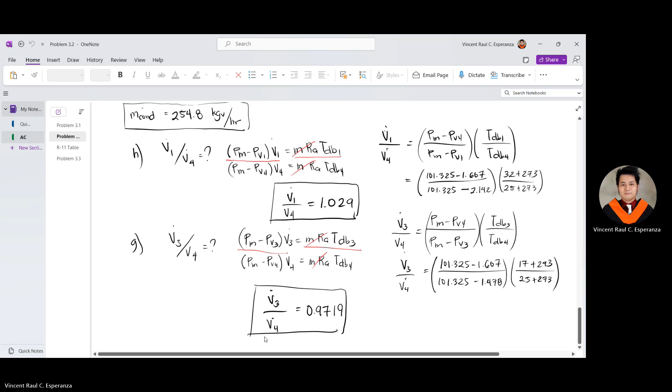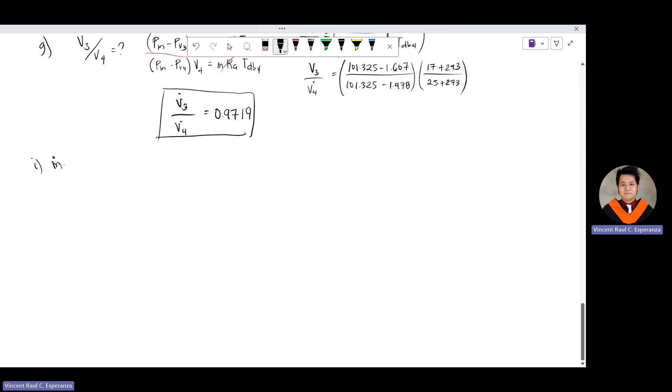I think we need a table for this. So letter I: what is the mass of R11, or let's just call it mass of the refrigerant, capital R, in units of pounds per minute. The mass of R11 per minute, given the evaporator temperature is negative 20 degrees Celsius and the condenser temperature is 30 degrees Celsius. So this is an application of refrigeration.

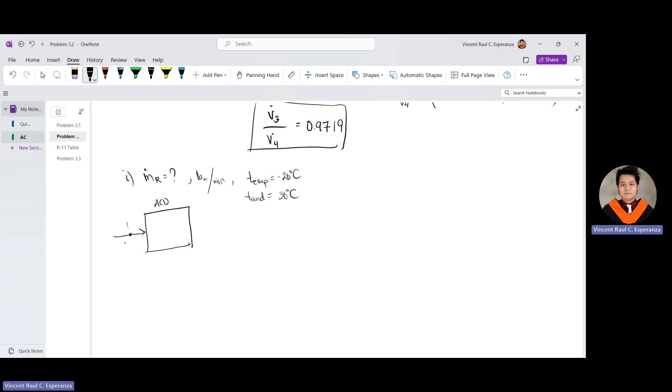So first we will draw the air conditioning unit. This is our ACU. At point 1, air enters with a given dry bulb temperature and relative humidity, which we already solved. At point 2, we have the dry bulb temperature, which coincidentally equals the dew point temperature at point 2. And if not stated, for a cooling and dehumidifying process, the relative humidity is equal to 100%.

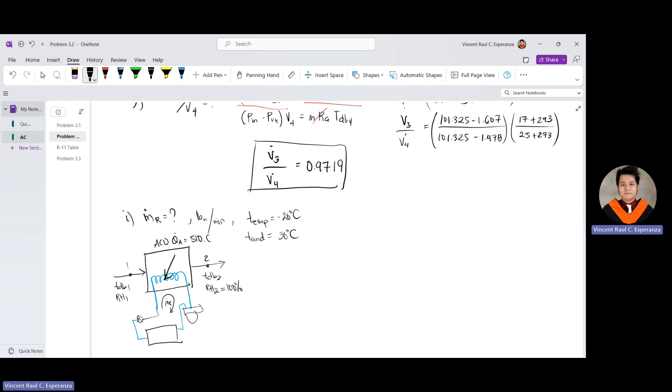So what is QA? 510.6 kilowatts. We already solved this yesterday. 510.6, is that correct? Yes, 510.6. Okay.

So we know that in the evaporator, which is also our air conditioning unit, QA is simply equal to the mass of refrigerant. Let's label these points. If we go up to this point, let's call it point 5, point 6, point 7, then point 8.

Mass of refrigerant times H5 minus H8, where H5 and H8 are the enthalpies of R11. So the best approach here is to draw a pH diagram for R11.

At point 1, at point 5, this is a saturated vapor, and the temperature mentioned there is negative 20 degrees Celsius. Let's go to the R11 table. I think this is it. Let's find negative 20 C, saturated vapor, so HG is 378.66.

So going back, hence H5 is 378.66 kilojoules per kilogram. Let's note that. Then from point 5, there will be an isentropic compression.

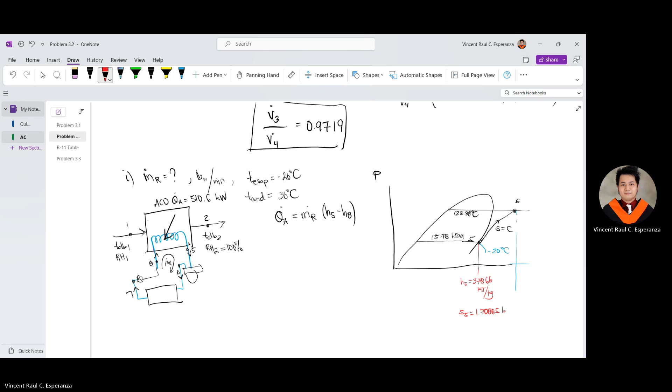1.70885, let's write that down: 1.70885 kilojoule per kilogram-Kelvin. And we know this is an isentropic compression, so the specific entropies at point 5 and point 6 are equal. Since they're equal, let's go to the R11 chart and find the pressure at 125.38 kilopascal.

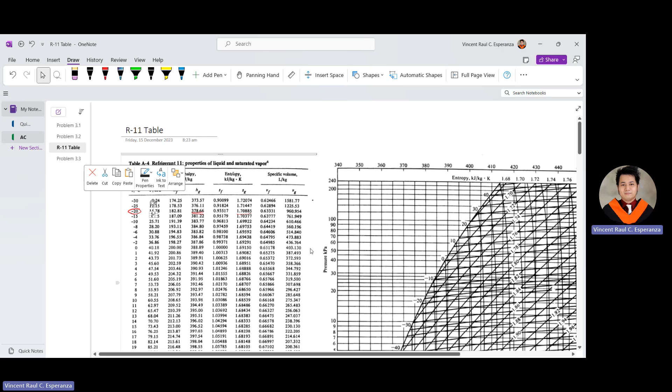Here's our chart. Let me zoom in. There's 125.38. Since this is 100, how many gradations? 1, 2, 3, 4, 5, so this is 150, sorry, 5 more so 200. 200 minus 100 divided by 5.

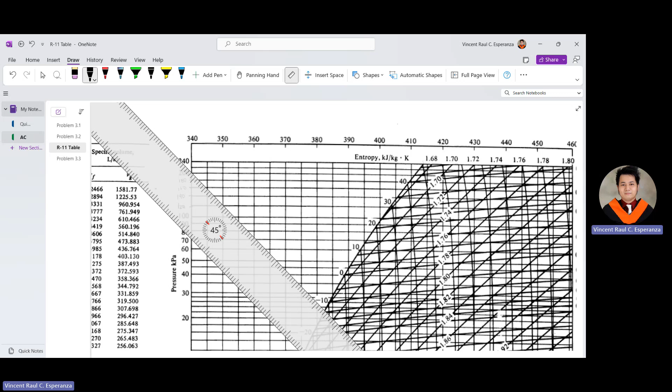Divided by 5, sorry, that gives 20. So the gradations are 120, 140, 160, 180, and 200. And our value is 125. If it's 125, okay, there's a ruler here too.

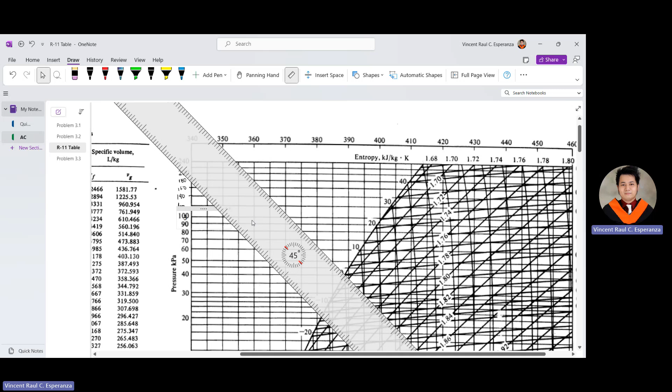So i-drawing natin ang 125. I think dito siya. Yan, 125 kilopascals and yung entropy niya, that is 1.70605, parang 1.71 na natin approximate. So I think 1.71 ito. Yan, so ito yung point na i-consider natin. Highlight lang ito, ating kulay pula.

Ito. At ano yung enthalpy associated dyan? And that is, kung ito 410, 415, kalahati ng 410 at 415. So ano yun? That is 412.5, yun yung ating enthalpy at 0.6. Hence, enthalpy at 0.6 is 412.5 kilojoules per kilogram.

At 0.7, this is what? Saturated liquid. So tandaan natin sa standard vapor compression cycle, at 0.5 the refrigerant is a saturated vapor. At 0.6, wait let me check if this is recorded. Ayan, recorded na siya. At 0.6, the refrigerant is at superheated vapor. And at 0.7, due to heat rejection, we convert the saturated superheated vapor to saturated liquid. So saturated liquid, yung may subscript na F. Remember your thermodynamics too.

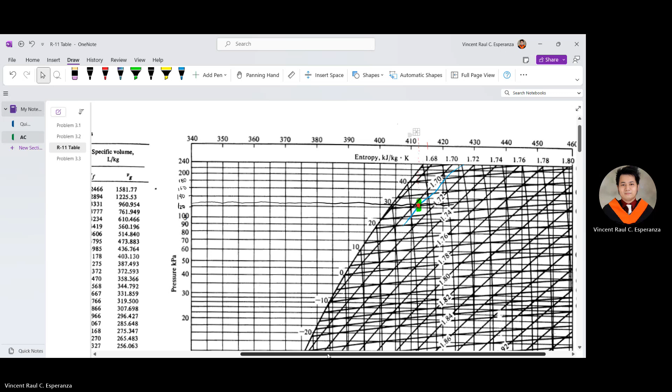At alam natin, from 0.6 to 7, isobaric heat rejection yan. From 0.7, hanapin natin yung HF at 30C. So pull tayo sa R11 table. Balik punta tayo sa 30C. Yan, then at 30C, ang HF niya is, see? HF is 226.10.

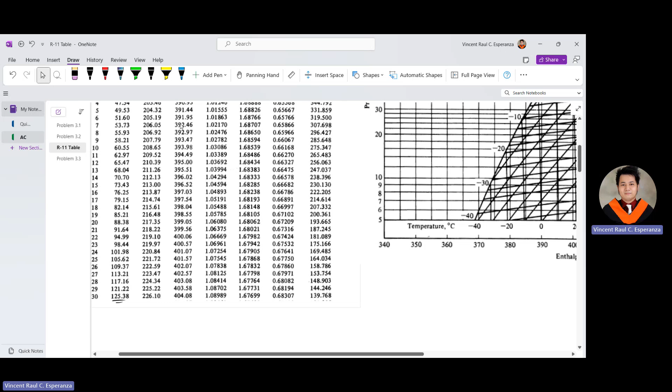H7, that is 226.10 kilojoules per kilogram. At nagkataon na yung 0.7 equal din yan sa 0.8 kasi alam natin in the expansion valve, that is an isenthalpic process or wire drawing process. And from process 8 to 5 or 5 to 8 or 8 to 5, that is what, an isobaric heat addition. Okay? So ang kailangan natin ito yung QA sa isobaric heat addition. Kasi dito ito this is QA.

And this is heat rejection. And this is what? The work of the compressor. At ang work ng expansion valve naman is 0 kasi wala namang work associated doon since the enthalpies are equal. Okay? So meron na tayong ang H5, meron tayong H8 at ang QA equal din sa QA ng refrigeration load ng air conditioning unit.

So isolve na natin. So we have 510.6 kilowatts is equal to the mass of refrigerant, the enthalpy at 0.5, that is 378.66, and the enthalpy at 0.8 is 226.10. Then shift solve, what is the mass of refrigerant? But take note, this is in kilograms per second, so mamaya mag-convert tayo.

So ang sagot, that is 3.347 four significant figures. So 3.347 in kilograms of R11 per second. Okay? But take note, we need to convert from kilograms per second to pounds per minute.

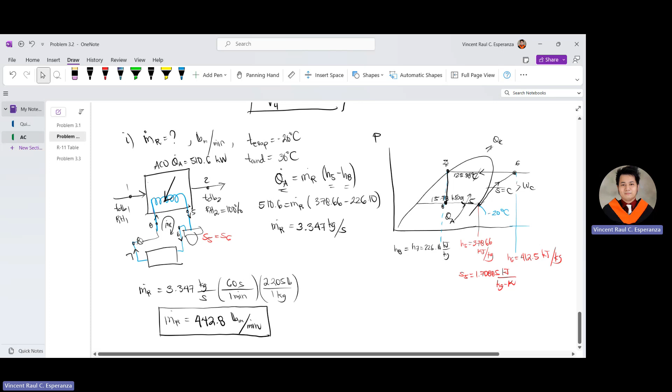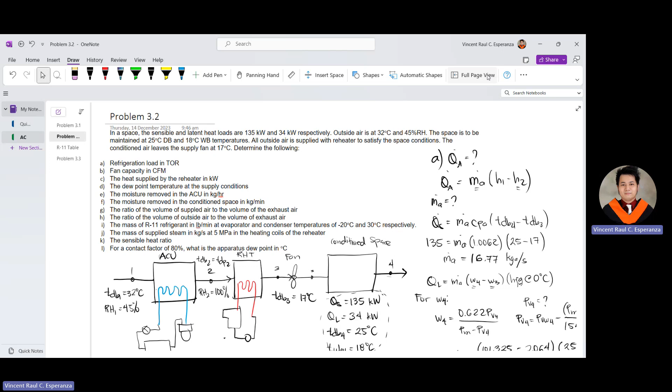Okay, then let's proceed to letter J. Sa reheater naman, what is the mass of supplied steam? I think that may pull na. Mass of supplied steam. Yan. Sige, J na tayo. So letter J. Ano naman yung mass of steam, MS required? If yung pressure of steam is equal to 5, I think that is 5 megapascals. If I am not mistaken, 5 megapascals. So yan yung magpapainit ng hangin sa reheater coils.

Okay, so let me draw first the reheating unit. So ito yung reheater. Tapos papasok dyan at 0.2 na may dry bulb temperature at 0.2 at may enthalpy at 0.2. Pagkalabas din dyan ay 0.3 na may dry bulb temperature at 0.3 and enthalpy at 0.3. At alam natin this is what, sensible heating. Tapos ang ano kasi dyan is ang magpapainit kasi sa hangin is steam coil. So may steam coils tayo dyan. Tapos may mag-generate nung steam. Siyempre yun yung steam generating unit natin. Okay? Tapos siyempre, ipapump yan ng ating steam pump.

Ang goal natin is para malaman yung mass of steam. Ngayon, kapag hindi binigay sa problem yung condition ng steam, kunyari this is 0.8, so ito ay 0.9 at ito ay 0.10. Kunyari hindi binigay sa problem.

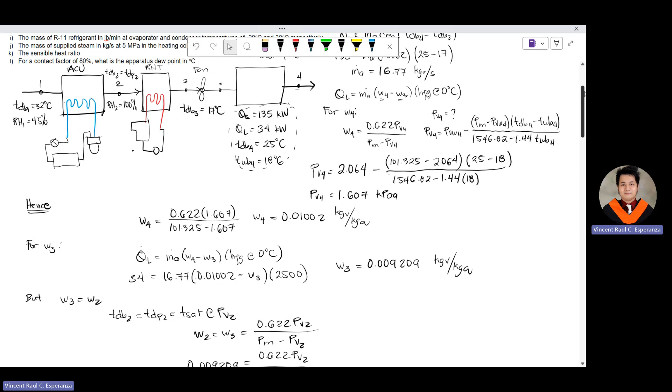So sige, solve na natin. So ano ba yung reheater load natin? Sinolve na natin yun, QRH sa letter C. Yung heat supply ng reheater, that is 72.11 kilowatts. So we have 72.11 kilowatts mass of steam.

Tapos ano yung HFG? Kunin natin sa table ng saturation pressure, Table 2. Hanapin natin, naka-megapascal yan, mag-ingat kayo, kaya tingnan nyo yung 5 megapascal, hindi kilopascal. At 5 megapascal, ang HFG niya according sa steam table is 1640.1 kilojoules per kilogram of steam.

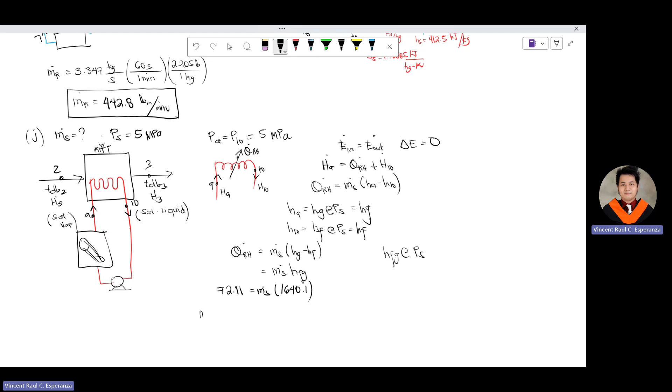So tingnan natin kung ano yung sagot at ano yung units na required. Ang units na required ay kilograms per second lang. Ano ang mass of steam in kilograms per second? So 72.11 over 1640.1, that is 0.04397 kilograms of steam per second. Yun yung sagot sa letter J.

Okay, so next naman tayo. Ilan na lang? Dami pa nito, Diyos ko. Hanggang L. So we have the sensible heat ratio, letter K, madali lang ito.

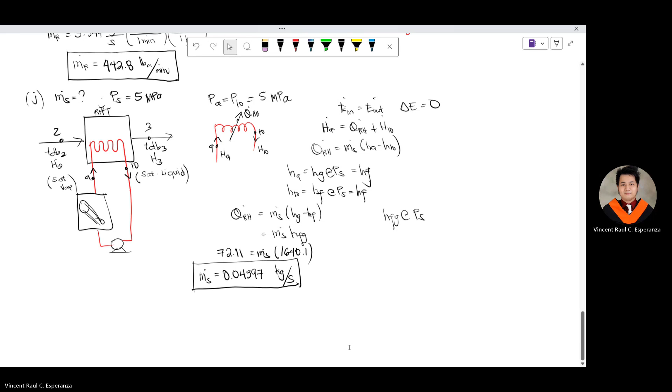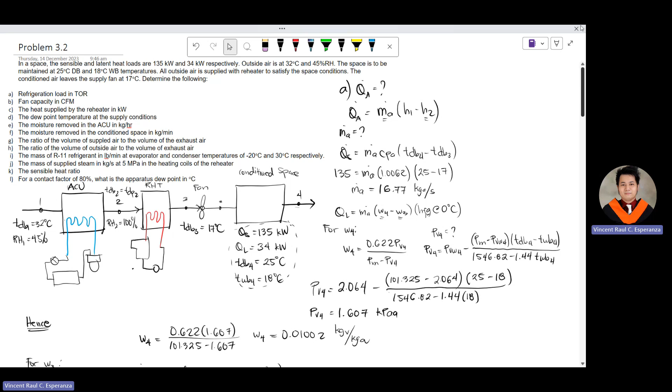Ano naman ang SHR or the sensible heat ratio? Alam natin yan, that is the ratio of the sensible heat to the total heat load, and we know that the total heat load is the sum of the sensible heat and the latent heat load. Yung binanggit sa problem, 135 is the sensible heat load and the latent heat load is 34 kilowatts. Ano ang sensible heat ratio?

So ang sagot is 0.7988. Okay, then, think last na, letter L.

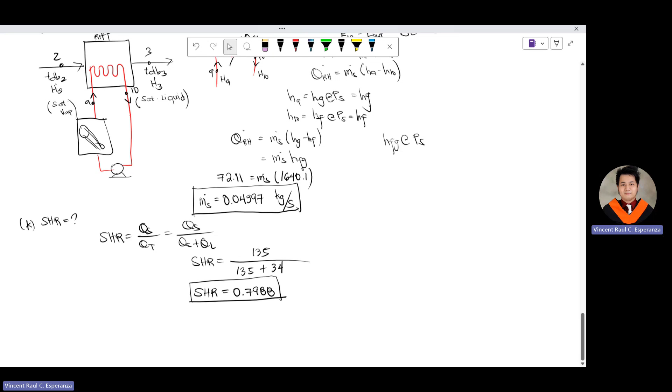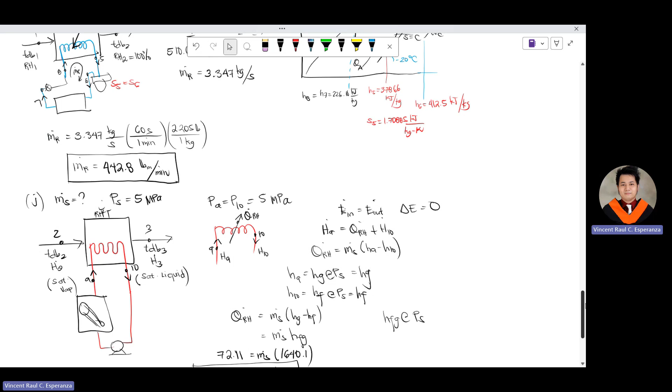Ano yung for a contact factor of 80%, ano yung apparatus dew point? If the contact factor, ito yung percentage of moist air that is in contact with the cooling coil, so our contact factor associated with the air conditioning unit, if the contact factor given is 80%...

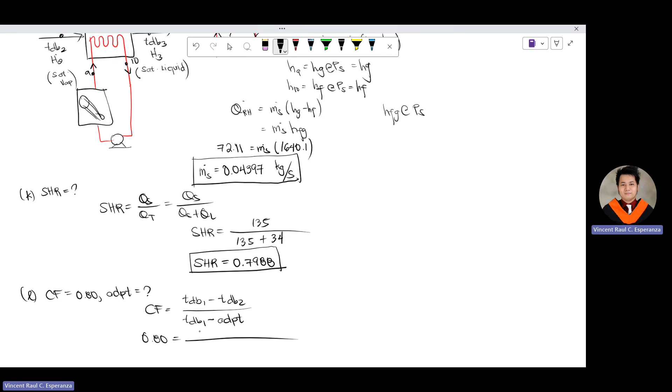0.80, ano ang ADPT or the apparatus dew point temperature? Alam natin, the contact factor or the cooling coil efficiency, yung difference ng dry bulb temperature at point 1 minus the dry bulb temperature at point 2, over the dry bulb temperature at point 1 minus the apparatus dew point temperature. So 0.80 is equal to the dry bulb temperature at point 1, that is 32, minus the dry bulb temperature at point 2.

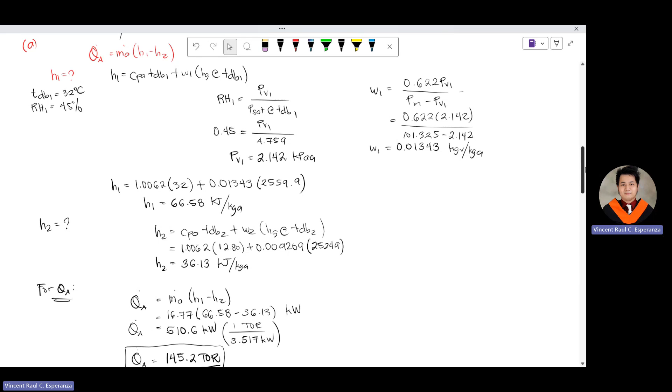Tingnan natin ulit sa problem. So the dry bulb temperature at point 1 is 32. The dry bulb temperature at point 2, yung nakalagay doon, and that is 12.8, kasi dew point at point 2 din yan eh. 12.8, ba? Yes, 12.8. Tapos 32 minus ADPT.

Ano ang apparatus dew point temperature? Sige, solve. 12.8 ito guys. So the apparatus dew point would be 8 degrees Celsius. Okay, sakto, ayan lang, I think that's it.